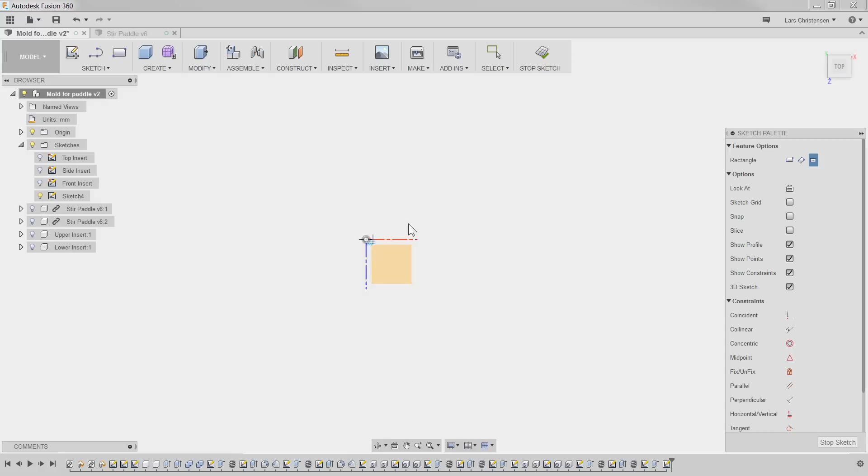And the biggest plate on this mold is going to be 396 by 396, like that. And we also have the mold plates themselves. They are going to be 396 by 296, like that there.

Now we could decide that we wanted to get the insert perimeter into this sketch. That might be helpful, so I'm going to use the project and copy that over. We'll be fine, so we can get that in from that top sketch.

I am also going to lay out some of the different bushing holes we're going to need here. So keep these at 30, and we're going to have a dimension from here to here.

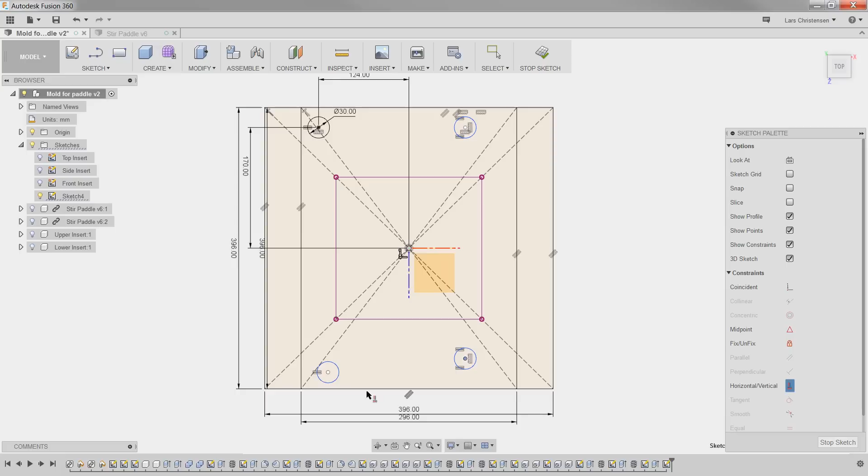So these 4 holes here are the ones that are going to be the locating holes for holding the whole mold together. We're also going to have some screw holes going through here, so I am going to put those in. I'm going to stick with 12 millimeters for that.

Now those are going to be in line with our bushing holes, so that's easy enough. And they're going to be in line with each other here. And they're going to be all 12. There we go, and they need a dimension.

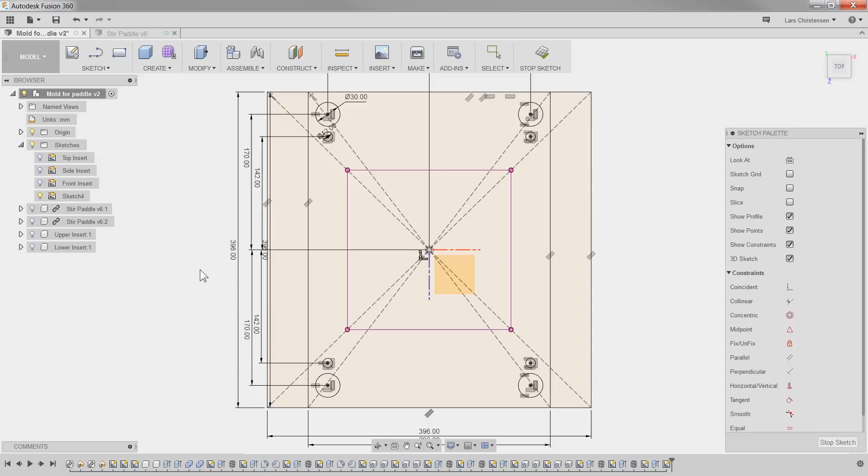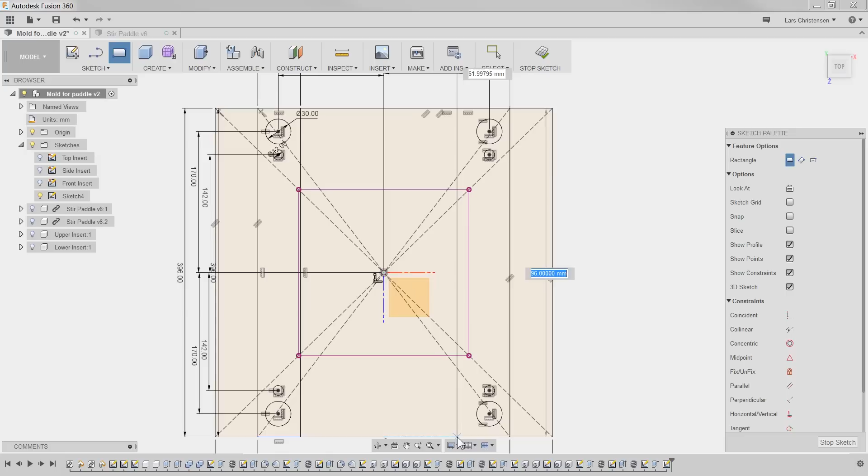Now another thing we need in here that I can recall as I'm sitting here drawing right now is we also need the risers, so we can put those in on this view too while we edit. So they are going to be 56 wide, and we'll have 2 of those, so I like to sketch those in. Like that there — I don't think I got the end of them. So I'm going to make sure that those are collinear with this.

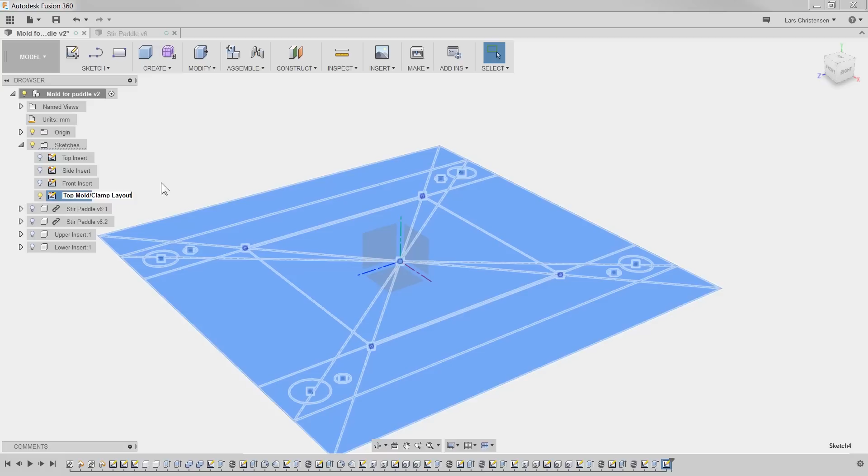And I think for right now that is pretty good for laying things out. I know I need to come back to these sketches later, but I'm going to call this one top, and I like to call them mold slash clamping. So kind of everything is contained in most of these sketches here. So we got one for that.

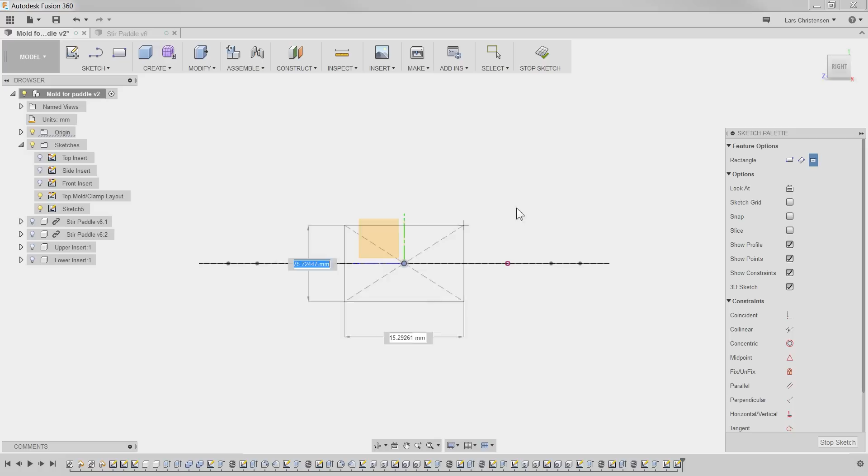And then I'm going to create the side one. And this one here is going to be a little bit more layered. So we can start out like we did before with our insert block — draw that one up there. And they are combined, so the blocks are 112. And again, the length of this whole thing is 396.

And I'm going to create that line to split the two, just like that. And then I'm just going to make sure what is top and bottom here. So this is the top we're looking at.

Now after this, we're going to have a spacing plate. And that's going to be 27 also, and that is going to be collinear with this.

Then we're going to have the riser, and those are going to be 56 tall, and again it's going to be collinear with that. And then at the bottom of those, we're going to have the last clamping plate. I'm not going to draw up the ejector plate in this view here. So that's also going to be 27.

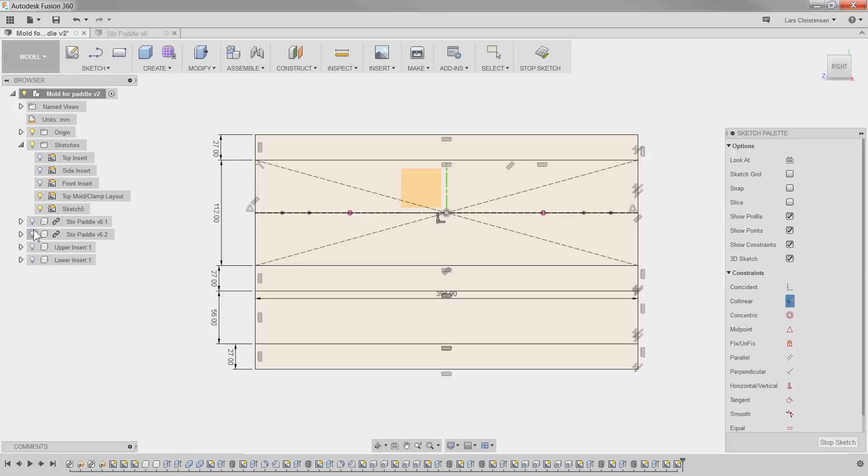And collinear there. Okay, now if you want to see, if I turn on the upper and the lower insert, you will see that they are sitting up there. That may have been a little bit helpful for you to see how everything is fitting together.

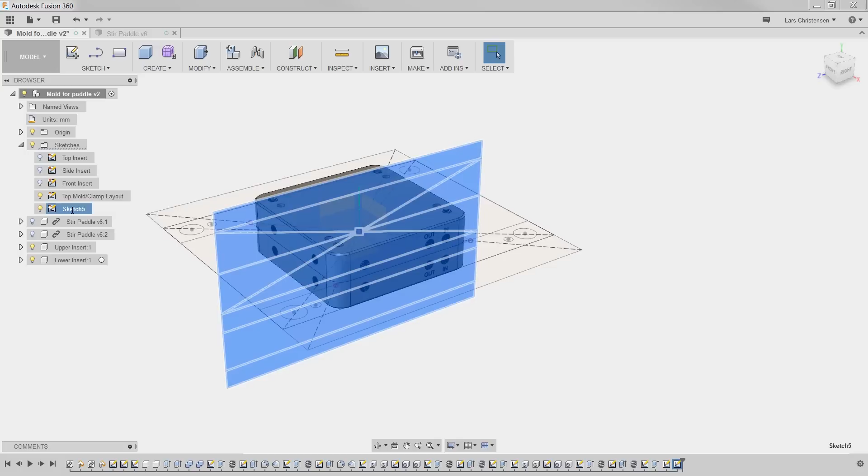So that is the side view of this. I'm going to go in and slow left click and call this side mold/clamp layout. Get that there. I can turn off these sketches, and I could now go in and create the last one here, which is going to be the front of this.

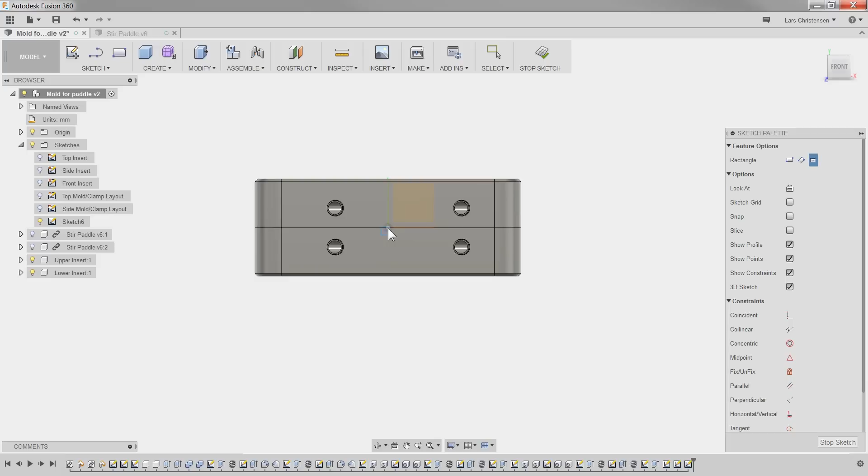So again, it's in a rectangle. It's going to be 112 tall by 296. That's our clamping plate right there. I'm going to hit L for line and create the center line there, and then build it up just like I did before.

So there is going to be a clamping plate up here. I'm going to draw it up here because it's going to be a little bit longer. The dimension here is 396, and it's going to be 27 tall. These two are going to be midpoint from here to midpoint from here, like that. So that's our clamping plate on the injection side.

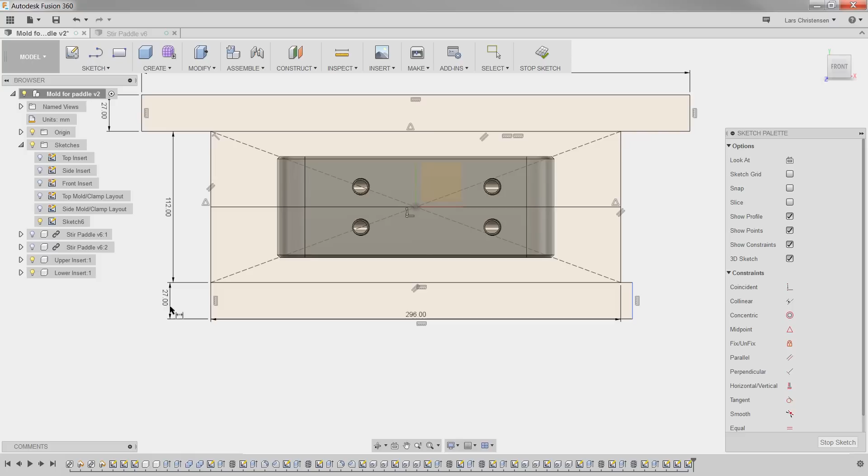Now down here, I'm going to create our spacer. 27. Make these two collinear.

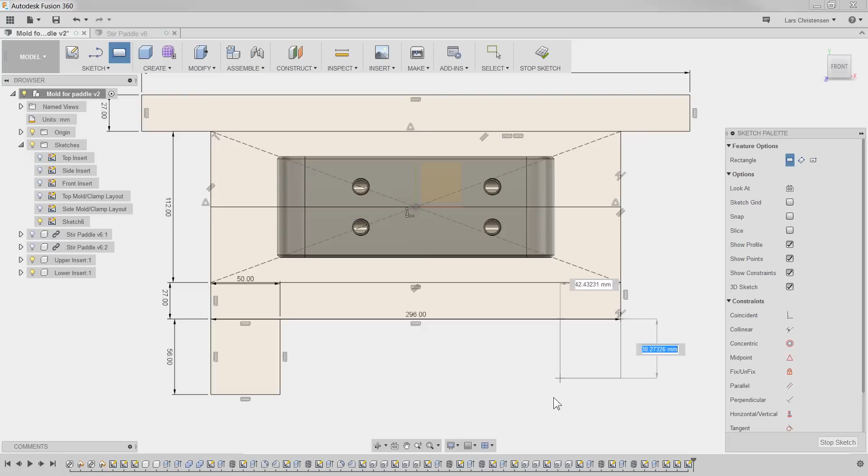Then we're going to have the two risers. They're going to be 50 wide. We actually have that dimension on our top layout too, if you remember. I'm going to make the risers here 56, and we're going to have another one of those on the other side, of course, 56 by 50, like that.

And then we're going to have a clamping plate down underneath here. So hit the S key, let's get the rectangle. It's going to be 27 by 396, like that here.

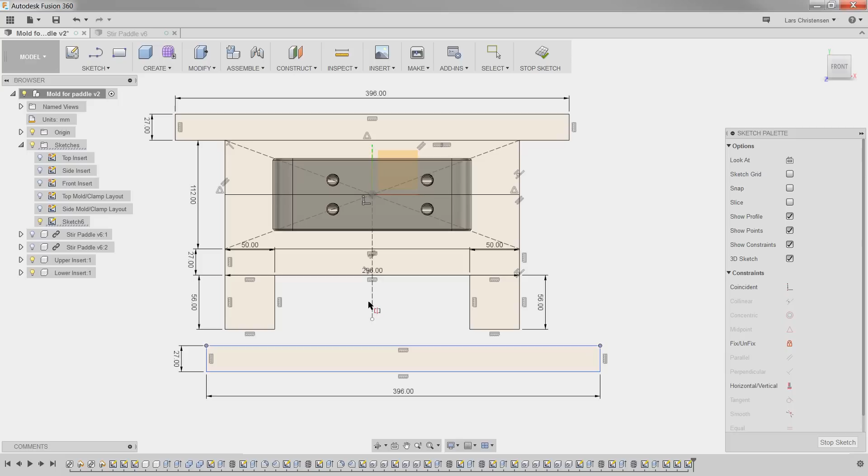Now I want to place it using the collinear. So I'm going to hit a line, it's going to be a construction line, sure it's here, hit X on the keyboard. And now I can use my favorite symmetry relationship right there, that's going to place the symmetry and then collinear from here to here, like that.

And now I could also go in, we're going to have the ejection plates in here. So now where are we at? Why don't we do that. There's going to be an ejector base plate, that's going to be somewhere in here.

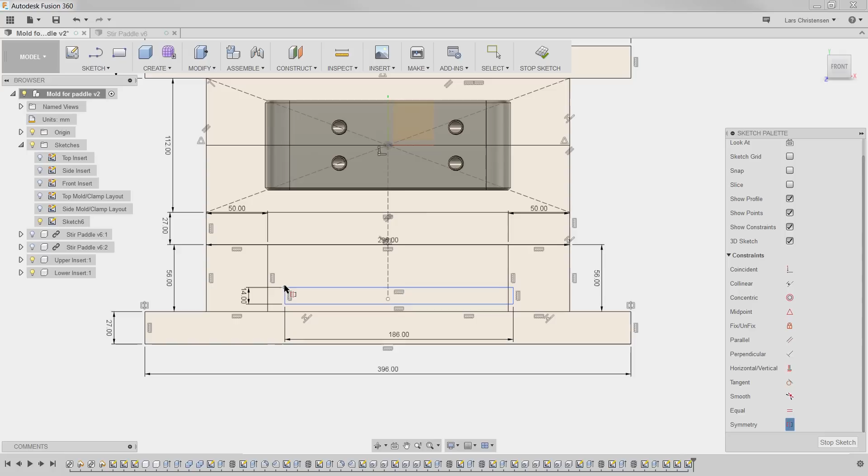I'm going to make the base plate 14 thick, and I'm going to make the width of it 186, like that. I'm going to use the symmetry again from here to here, and then place a dimension here to here, and I'm going to leave it at 5.

And then we're going to create the ejector retainer, the one that's going to hold the retainer plate. So that one's going to be 12, and make that and that collinear here. That's going to be the layout for the front of the layout sketch.

So I've laid everything out that we pretty much need, except for the ejector pins and the sprue, the inserting of the plastic. So I'm going to call this front mold clamp layout.

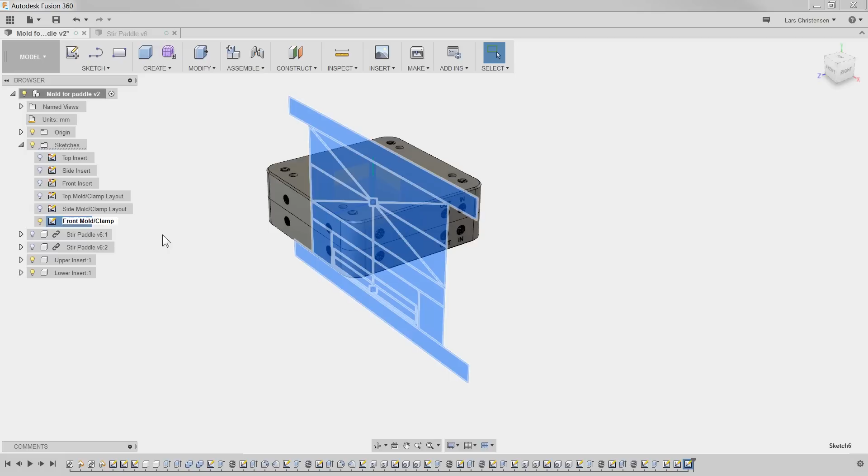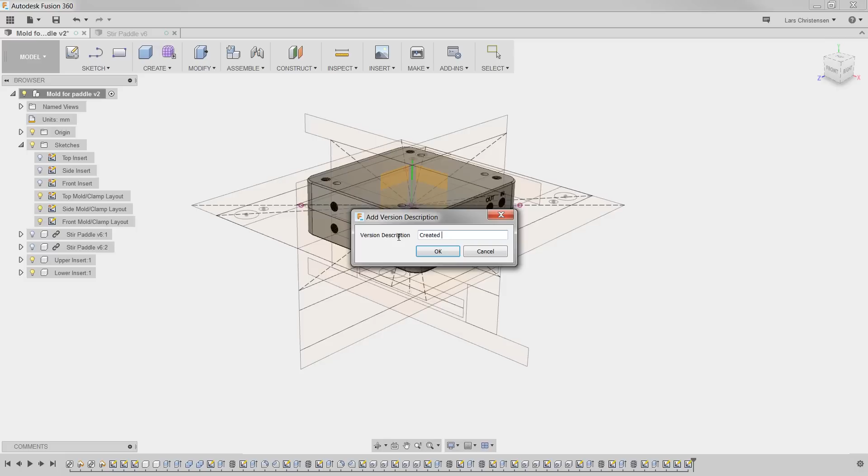So I really hope that with these sketches here, it starts making somewhat sense of how I'm laying everything out and correcting everything from these plates. Again, now at this point might be a good time to make a version. There we go.

Create all the missing plates we have right now. So I'm going to uncheck our cavity blocks, we don't really need those right now, and we can actually go out and maybe just do them all from the side here.

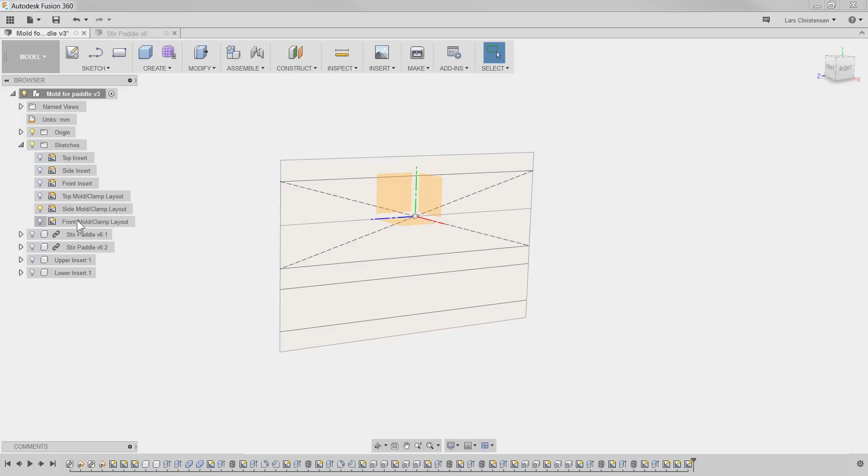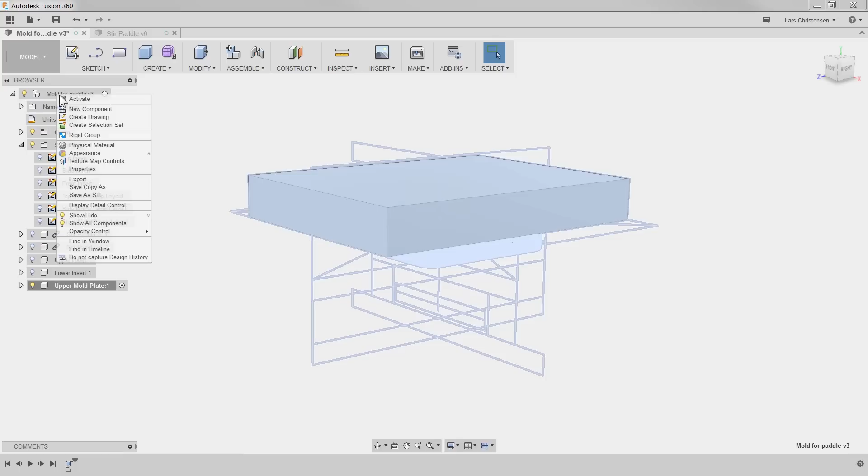And with that active, I can just go in here and do Q. Select our rectangle here, and just like before, I'm just going to go ahead, go symmetrical, full width, and then it's going to be 296. And then I can just work my way through this. Hit Q.

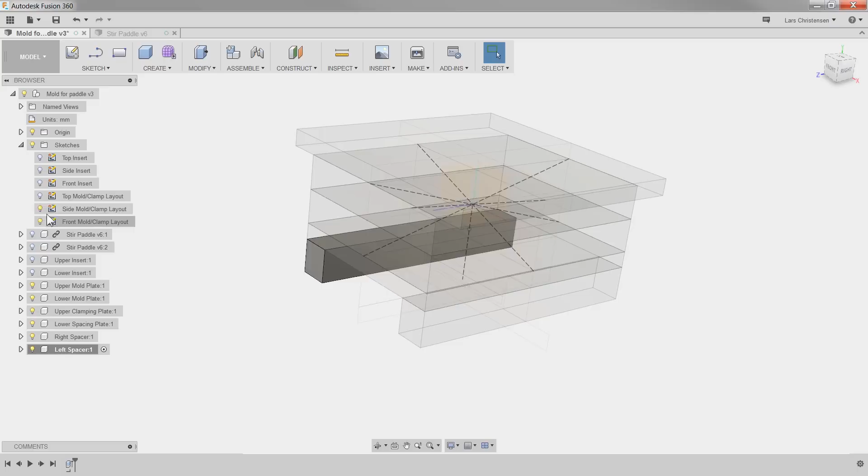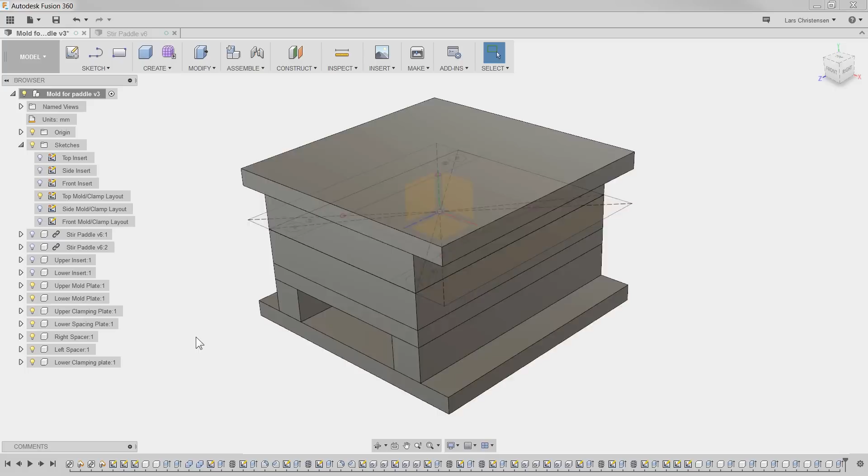So if I go over and make the top there, we really have the whole mold. We're still needing, of course, the injector stuff, the injector plate. But I think you now get a good idea about how we're using all these layout sketches, which means that with these layout sketches, I can start working with different things. So if we go back to the top one that we had before, we can now see that we have things laid out, and we can lay out the different parts that we need in here.

So what I probably will do now is I'm just going to start breaking down each component. I could actually be a little bit lazy and make cuts that go through numerous plates if I want to. Even though I'm out here in the active component, if I hit Q and I, for example, hit all our components here we have just created, and I select our bushing holes here, now I'm going to have this 30 millimeter bushing go through absolutely everything in here,

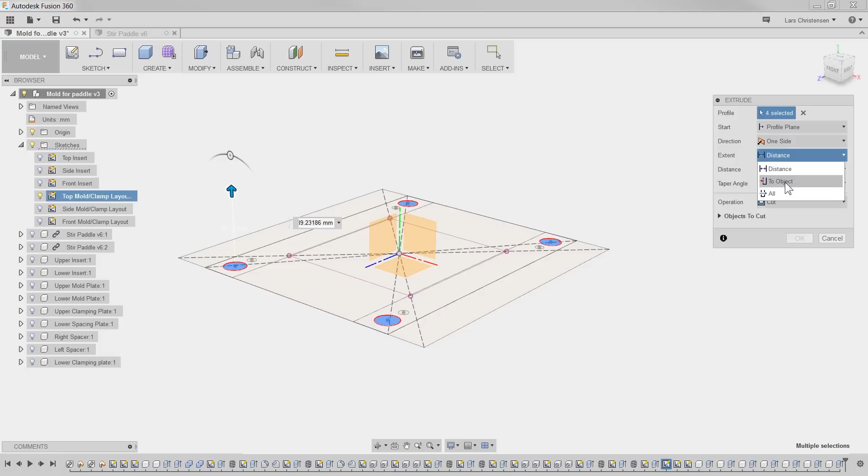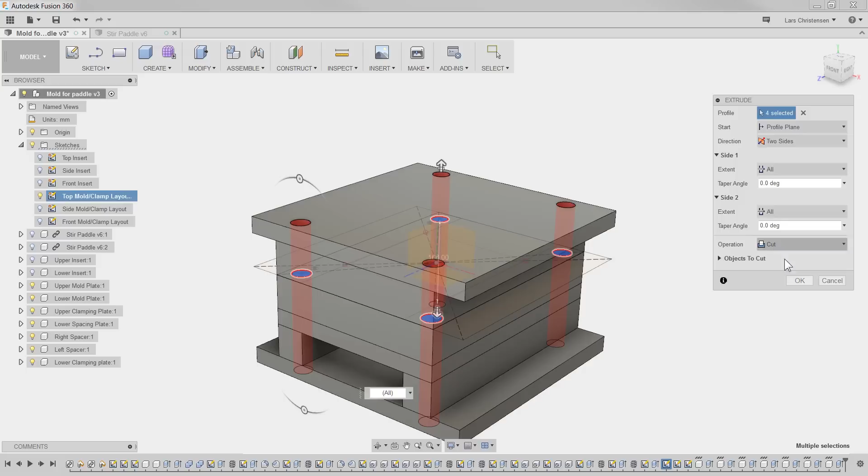through everything both ways, like this. So if I turn everything back on, I can actually grab here and grab here, and I can say through all, and just like this I have now created that cut, because that's going to be the same diameter all the way through the entire thing. And you will actually see, if we go in and we look at each component, we now actually have that cut right there, through them. So it will propagate down that way.

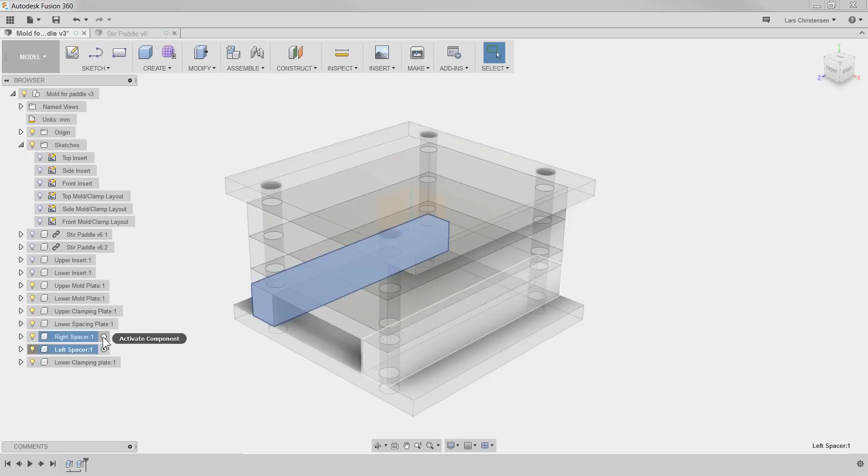But I think just to make it easier, what I'm going to do is work on each plate individually. I think that's a little bit easier. But again, the top sketch here is driving the different pieces. So with the upper mold plate here, I got a couple of things that I got to get in here. First of all, I got to get the screws in here, and I got to get the cutout for the insert plate.

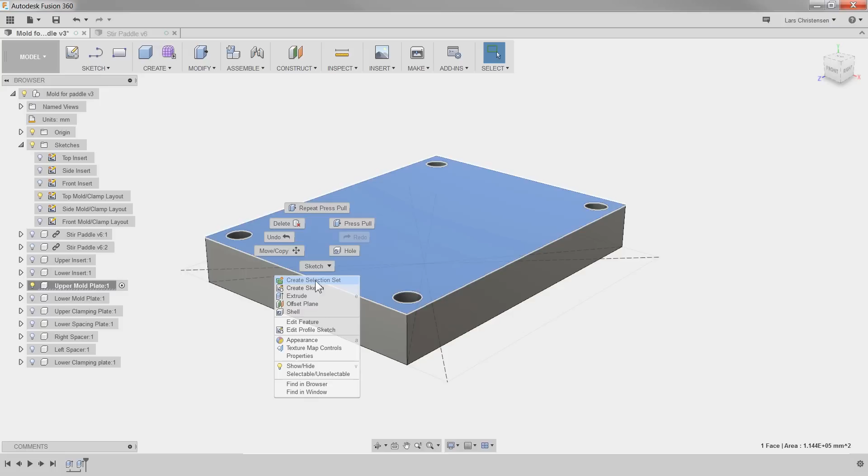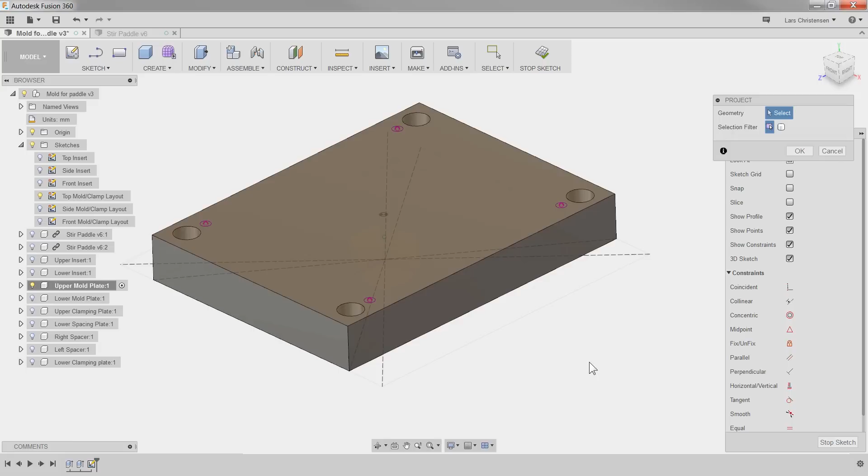So just as before, I can open up a sketch on the back side here, create a sketch, and I can project our screw holes. That's our 12 millimeter screw holes right here. Hit Q, and I can now do those just like we did with the inserts. Select those. Down here, -30. Like that. Select them all. Zoom in a little. That, and make them the 12 millimeter threaded right there.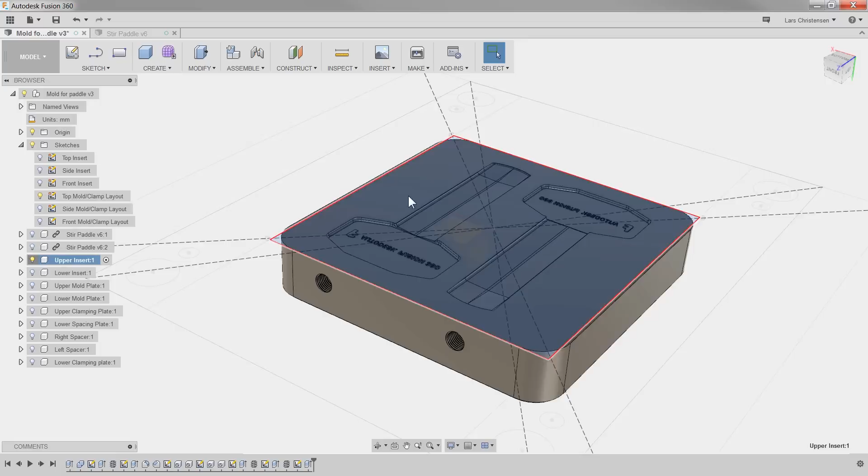The other thing I will do on this one is I gotta do the cutout for our insert. So this will be the upper insert, right? We gotta make a cutout for that one. So the upper insert here, make that exit for a second, is going to measure 37.5 thickness.

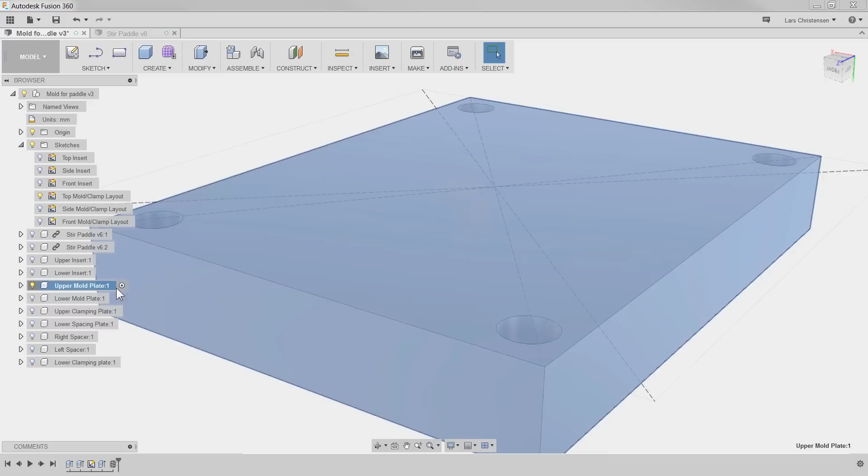So if we turn that off and go back to our upper mold, make that active, I'm spinning it around a little here, sorry. Create a sketch on that face. If we turn the top on here, we actually do have that cutout right here, so I can project the lines for that, like that. Hit Q, and we can extrude that down minus 37.5.

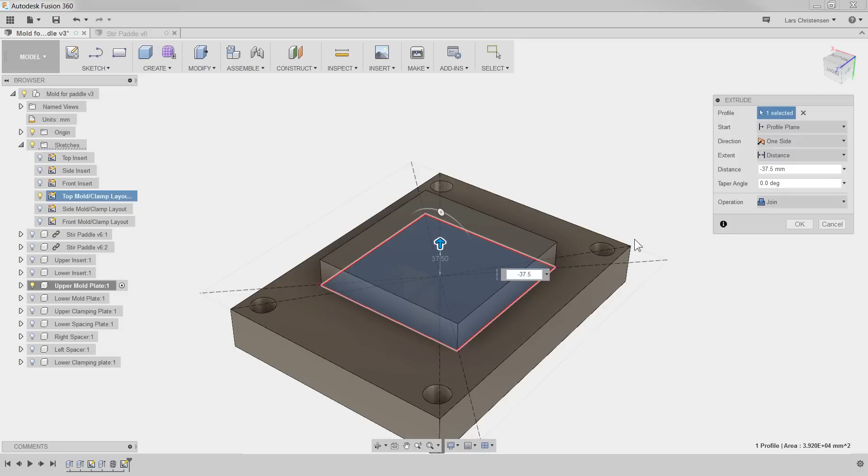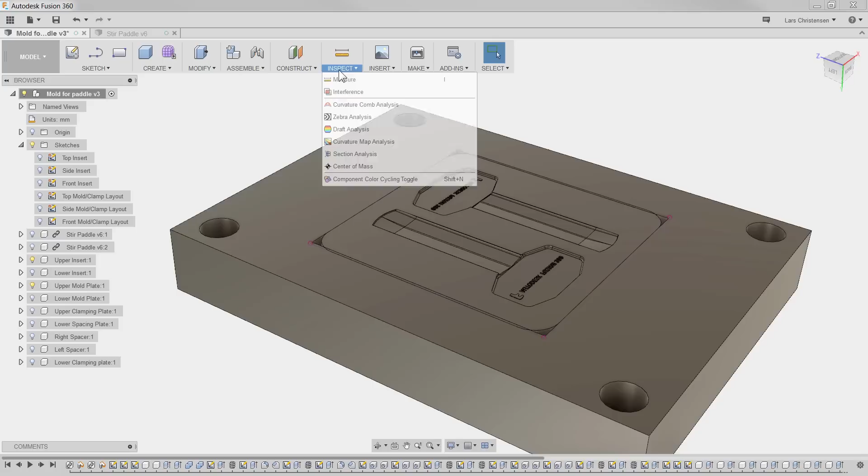Like that there. Now if I turn on the upper insert, we should see that that sits in there nicely. Hide that top sketch for a second. I'll turn the origin off. So now we have that in there. And again, don't forget, you can always use the section analysis tool to go in and confirm that things are as we want. Hide that upper one again. And now we can work with this one and get the things done to this plate as we want.

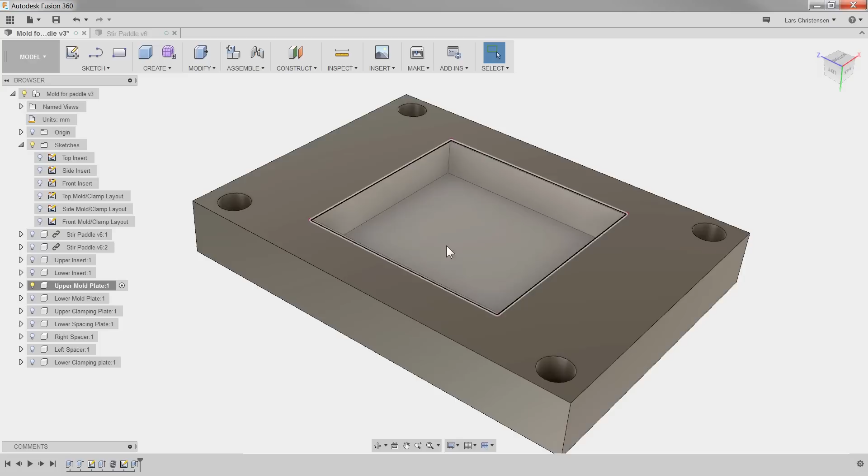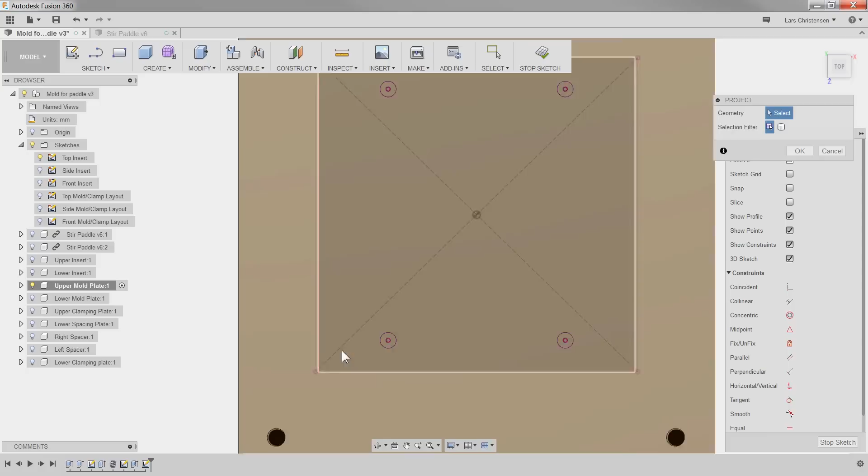We, for example, need to transfer the dowel pins and the screw holes from the insert over to this plate. So that is actually the top of the insert sketch up here, right? So if we turn that one on, we gotta copy those holes. So we can do that if we open a sketch down on the bottom here, create a sketch, and turn that insert on there, and then we can project the dowel holes, which can go all the way through like that. And the clearance holes here, we can actually offset that.

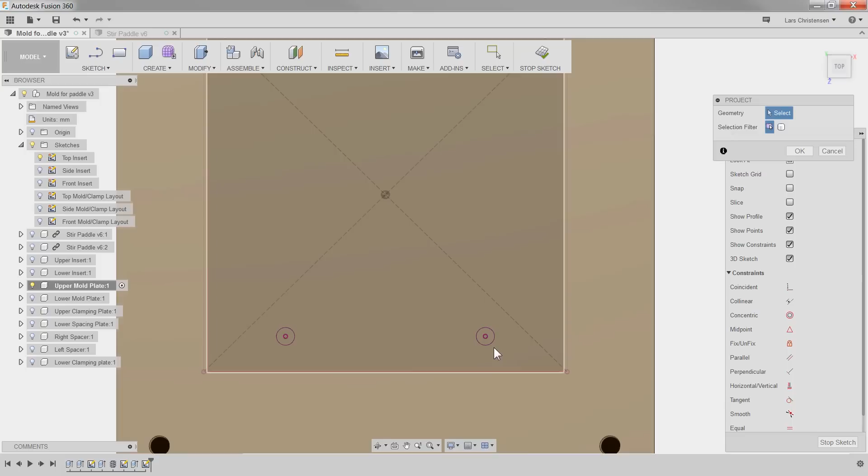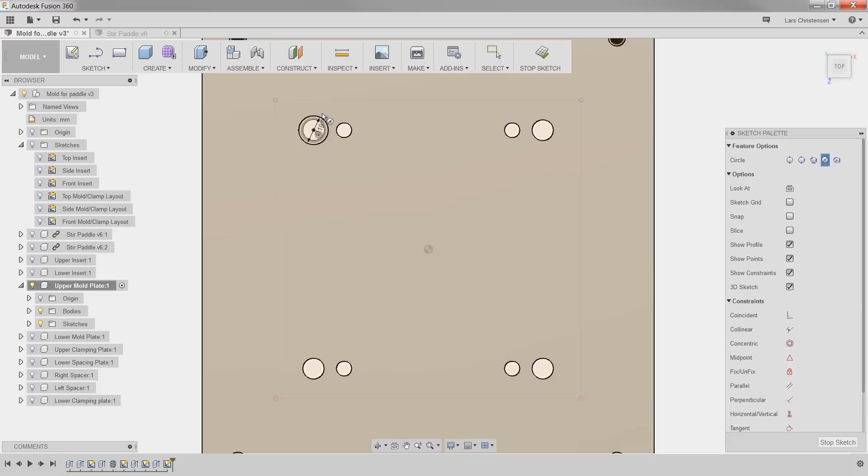So if we hit P for project, we can project, and then we can select the screw holes here. And then we can actually offset those by O. I want to do the counterbores, and actually here you probably again could use the hole command, and you could get the whole thing modeled in. So there might be a little bit more practical way to do this.

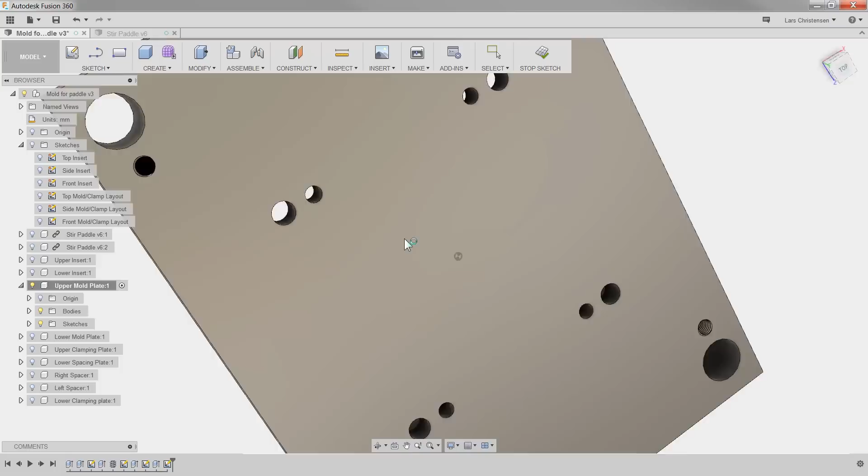This, and also I would also say that the depth here, you probably should also add the clearance in here. I'm just gonna do it to the nominal, which is 12 millimeters. But that is our counterbore and our dowel pins for the upper plate.

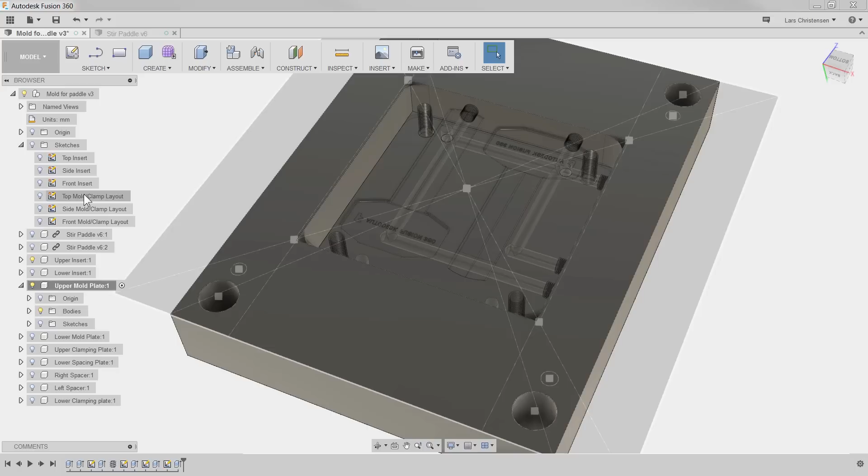So again, we're using the same sketches to create this as we did to put it inside of the insert block, which means that, again, if we ever need to change a dimension, if we decide to move the holes or the dowel holes in the insert block, they will automatically follow here.

The next thing I'm going to do here is also create some clearance holes for the water channel. So there's going to be some brass rods, pipes that are going to go in here to clearance, and also add some chamfers to the outside of this mold plate. And then actually repeat that and do it to the lower mold plate also.

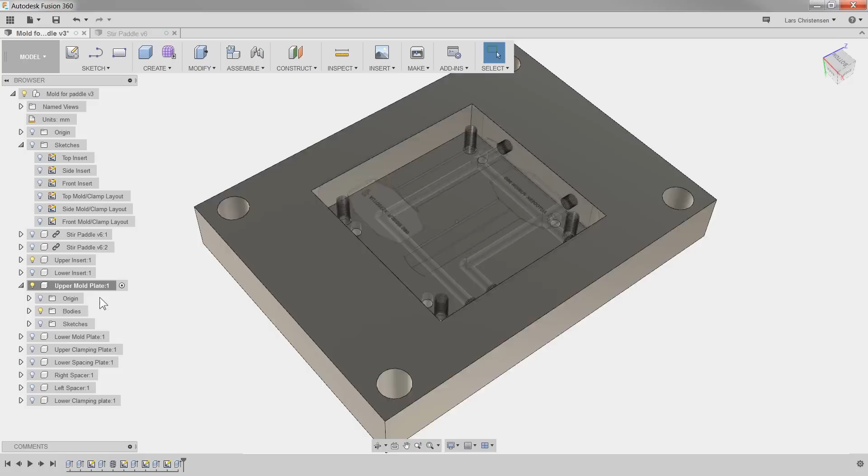And of course we can do a couple of things to this to make it maybe a little bit more pleasant, I guess we'll say. And of course, how crazy you want to get with the details on these types of things is completely up to you. Add some chamfers. Whatever we really want here.

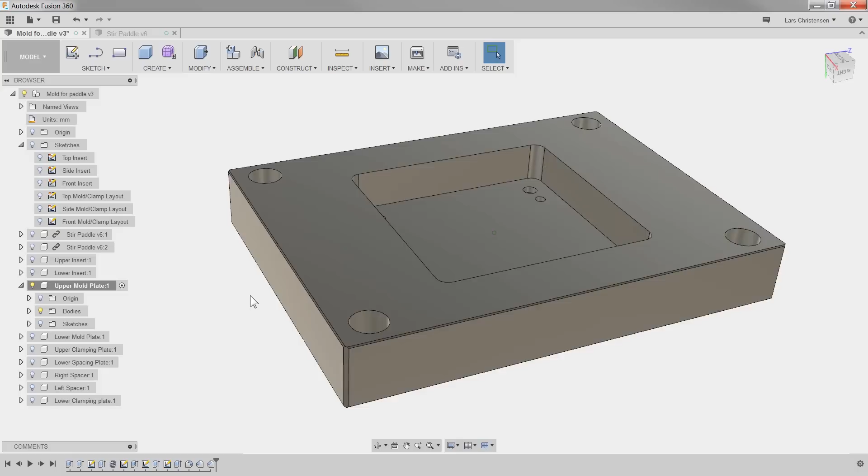And on this one here, we're also going to have a recess over here for when the bushing goes in, the pins go in here. We also still have to do the water channels. But before I go to that, I actually think that I am going to go and do the same thing to the lower plate as we just did now.

So if I turn the lower plate on, we will see that we need to do pretty much the same operations as we just did. For me, following them along in steps, pairing them up, makes a little bit more sense. So go ahead and do that.

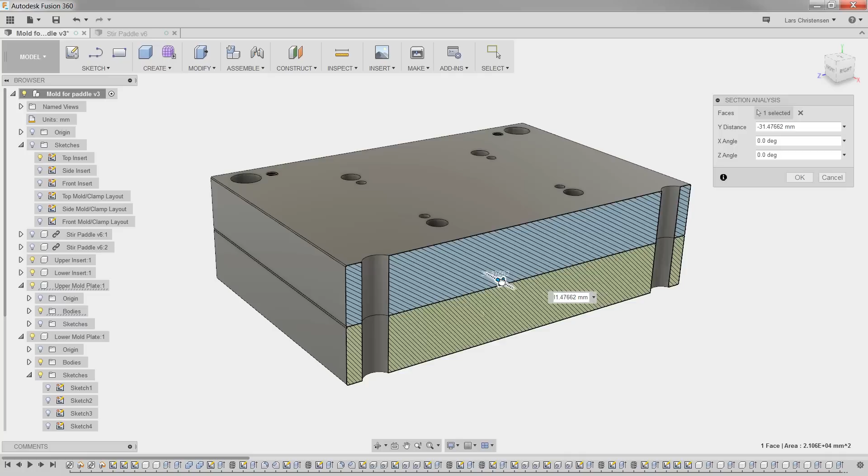All right, that should bring our part to just about where the upper one is. So these two are now identical, the upper and the lower, these two plates. And if we turn on the inner inserts, they should be in there too. I really like this section view. So there's our 12mm screws going through there. Then we got our inserts in here, and our screws and dowels and our parts and all that good stuff.

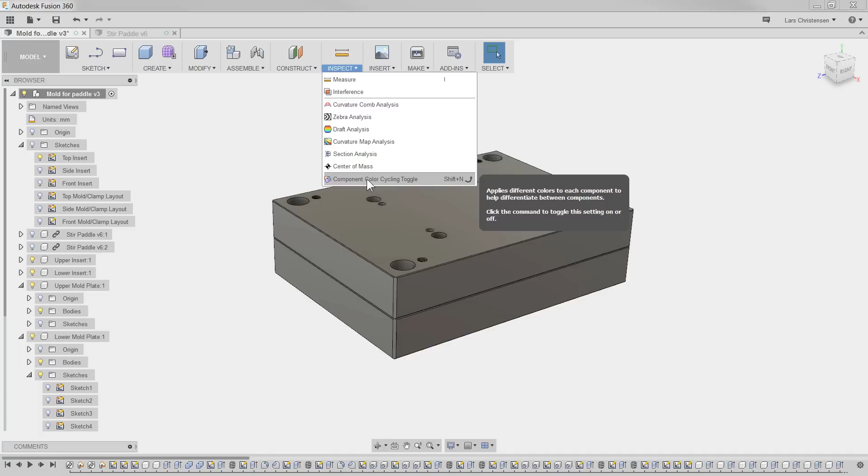Another trick that might be helpful to show is to turn on component color cycling, and that would actually give different components different colors. If I turn on the upper mold plate, you will see here is the upper insert, and if I turn the upper insert off, it's actually breaking everything down into components, which can make it a little bit better to break things apart. It's a nice tool to know about. I'm going to turn that off. So you can use that if you want to.

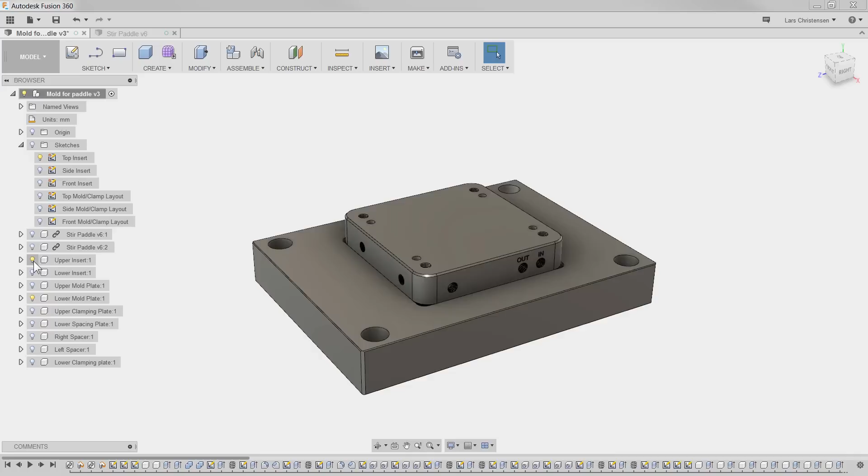Now a couple of things we need to do to these is the countersink, and we also have to do the coolant channel. Now the coolant channels are really just clearances for these two holes here for both the inserts. So if I just turn the inserts off, those two are clearance holes. If I turn those two on, that would be on the insert side. If we open that sketch up, we will actually see the shadows of those holes in there.

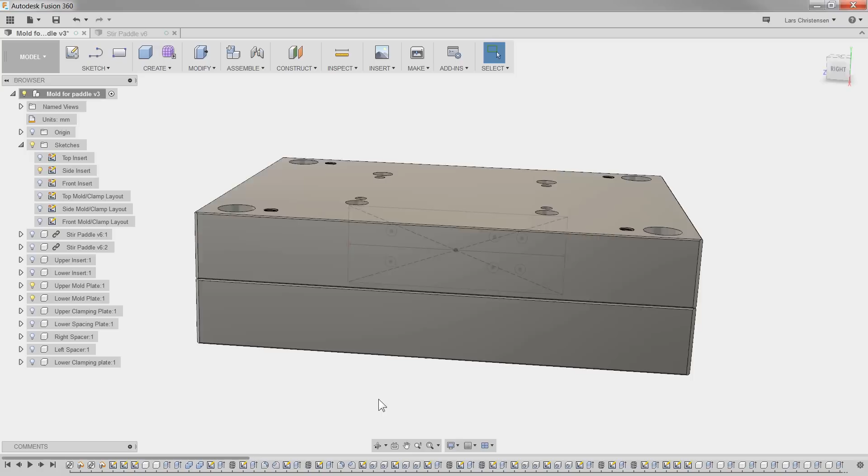One thing to know is that even though I'm out in the overall active component, if I turn these off and I do a Q and select them, I can actually cut them through the upper and the lower mold plates just from in here. But I actually want a little bit of clearance. I want them to be a little bit bigger.

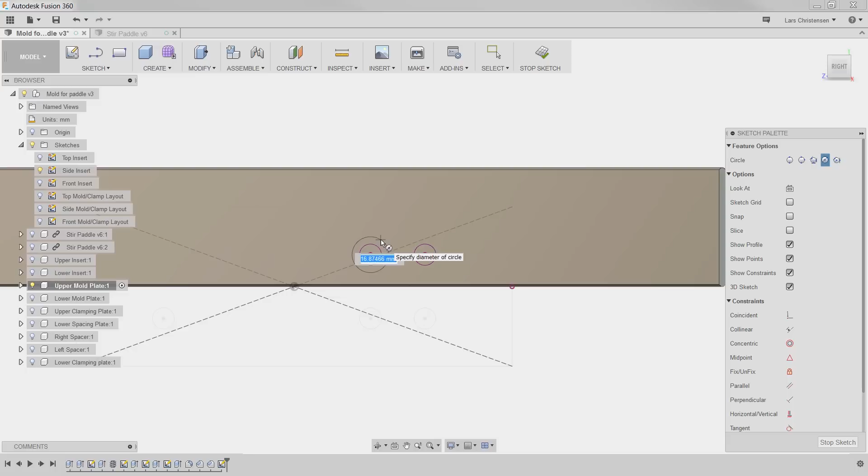So what I'm going to do instead is turn each mold plate active so I get the sketch, and then go in on this side here and create a sketch. I'm just going to hit P again for project, grab the two holes just like this, and then hit C for circle or O for offset, and you can now add whatever clearance you want. I'm not quite sure what size I want. Maybe I'm gonna make them a little bit bigger just because I know there's gonna be a pipe in there. Make them 18. And again, if I use relationships, I only have to change one to get them to the same size.

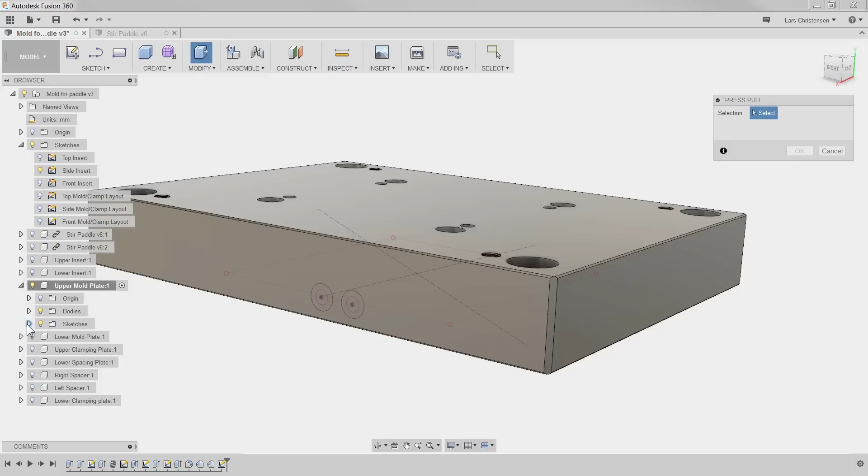Hit Q. I'll turn the sketch off and this one in here. Make sure I get both here. And then I'm actually going to cut with them, and I'm going to cut up to object, up to this face here. And there I now have that clearance. And I can go ahead and do the same thing to the lower one here.

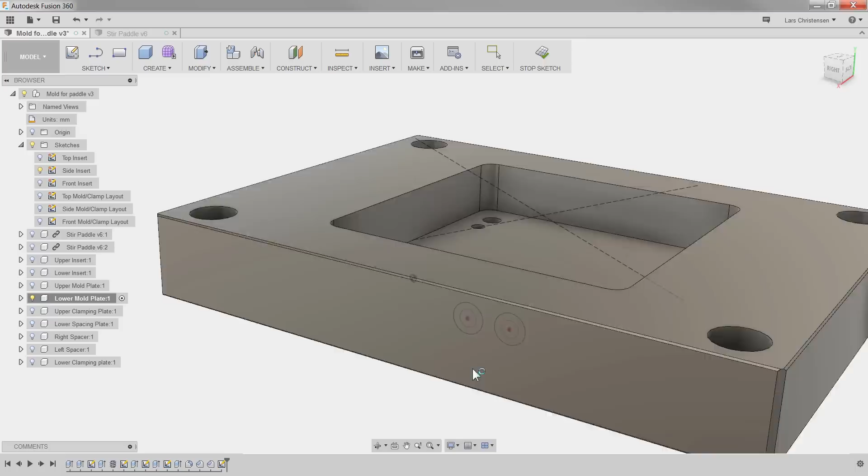Like this, we should see in here that we have these two holes. And again, because we projected these, if we're moving the coolant holes in our side sketch, if we're moving these coolant holes up and down, remember that was the ones that had the 15 in them, the 15 step, then everything will move along with that.

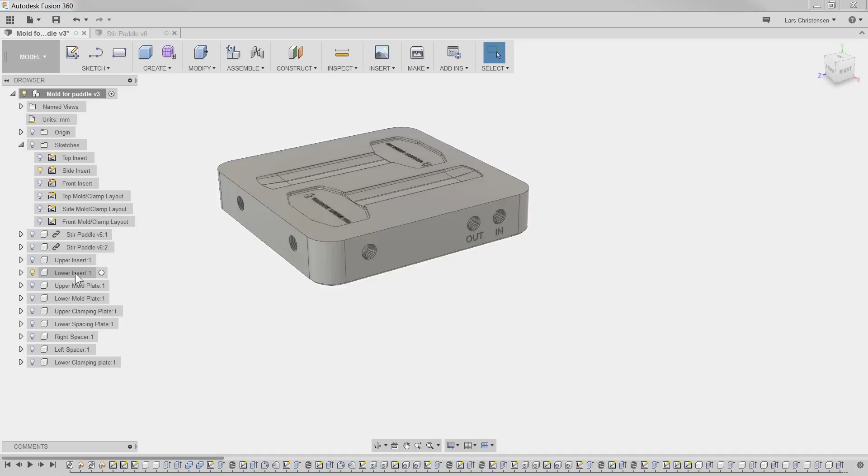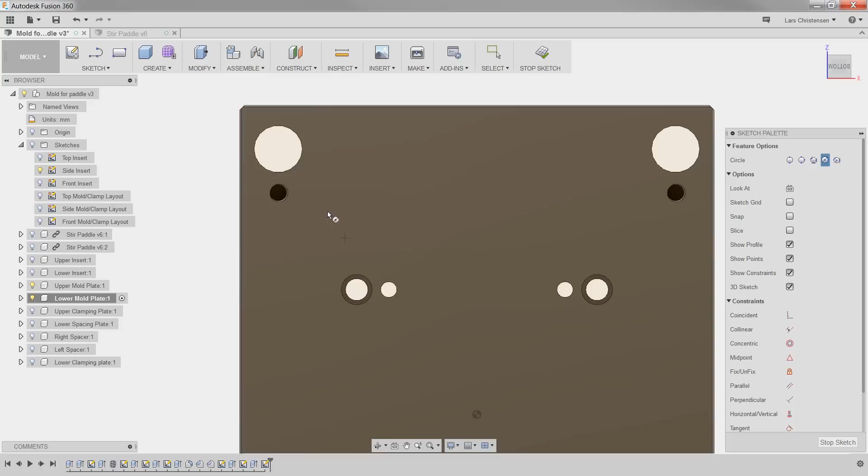Now another little nice touch, I think, for this is see how on the insert we have in and out, and I will carry that through on these two plates also. Put into these is the counterbore here on the back. And I'm just going to draw that on each individual plate. So C for circle, it's going to be 41. And they're going to be 6 millimeters deep. -6. Do the same thing to the other side.

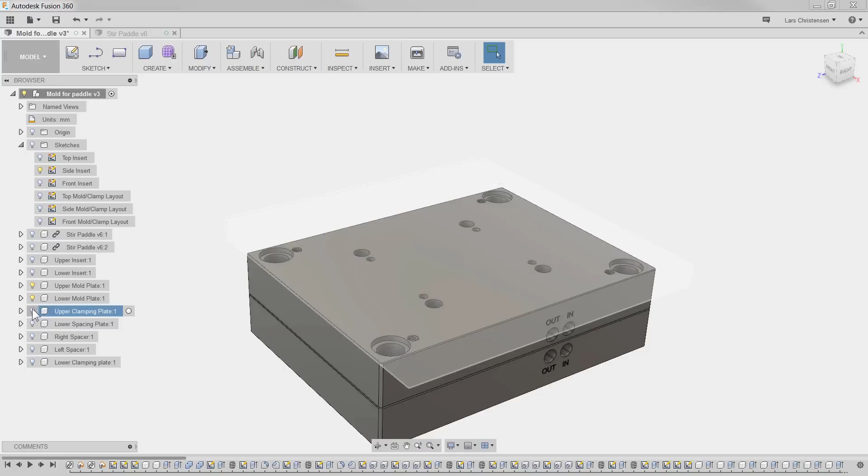And there we have the two mold plates. Still a few things we need to do: the injection and the sprue. Now we can move on to the upper clamping plate. So on that one here, we really just need to put in the counterbores for the screws. And then on the clamping plate, there's also going to be a recessed ring here for the sprue locating ring. Again, I'm going to go back to the top layout sketch to get the location of these holes.

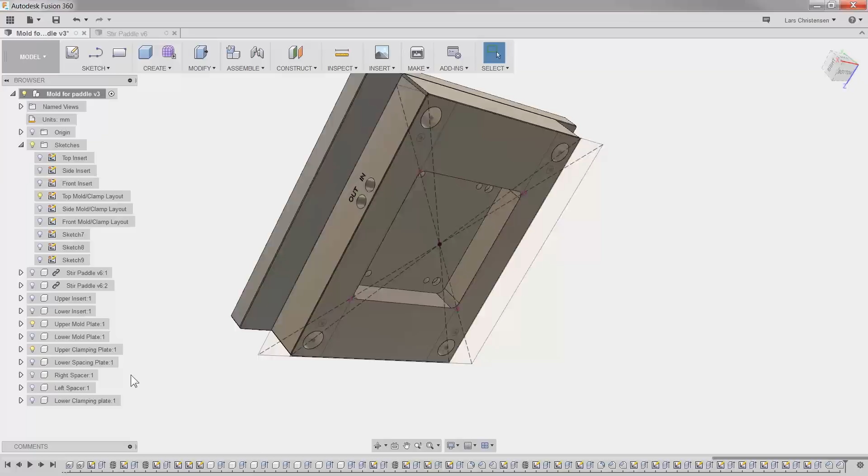That's the upper plate. Now we got the upper and the lower plate there. And if we turn the upper insert on, we can kind of see that we have that first section, really half of the mold here, besides, of course, we still got to do the sprue in here.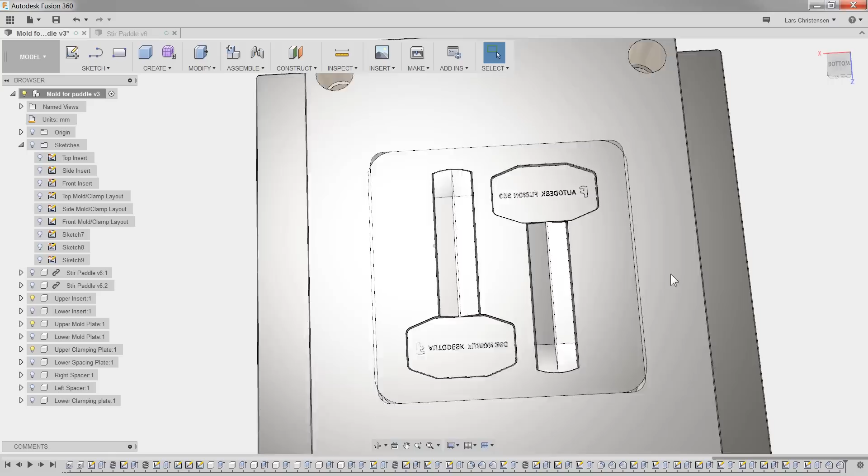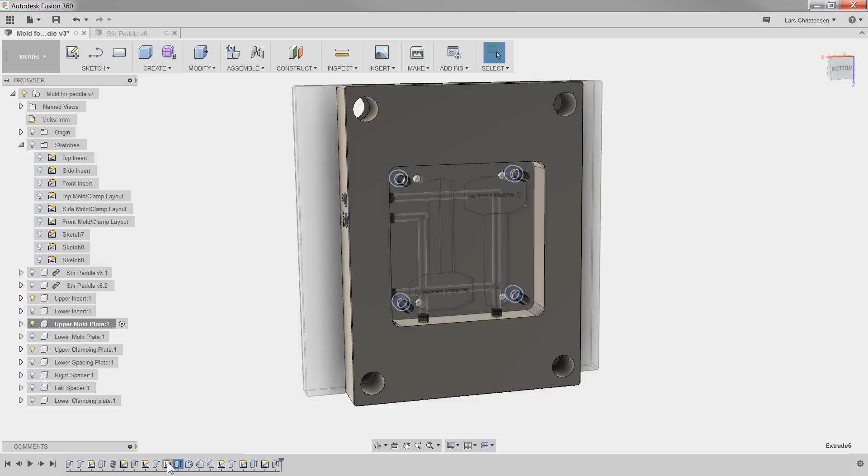If I'm looking here, you can actually see that I made a mistake. I picked the wrong side to cut out on the side here. So that is a perfect example of a mistake, but I have a feeling that it was when I made the cut in this plate. So if I click on this one and I make it active, I should actually be able to find out where exactly that cutout happened. There's the screws. So I bet you that it is this cut here. I didn't select the right thing. So I'm just going to right click and say edit feature. And if we hide some of this other junk and we go normal to the top, I have a feeling

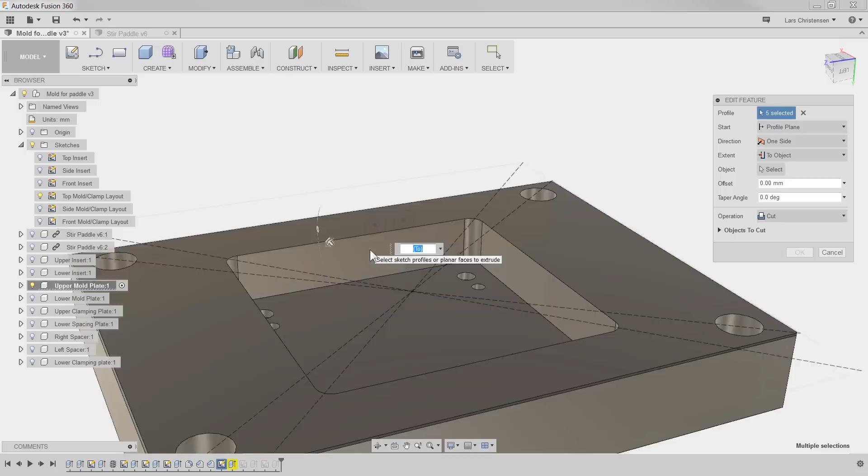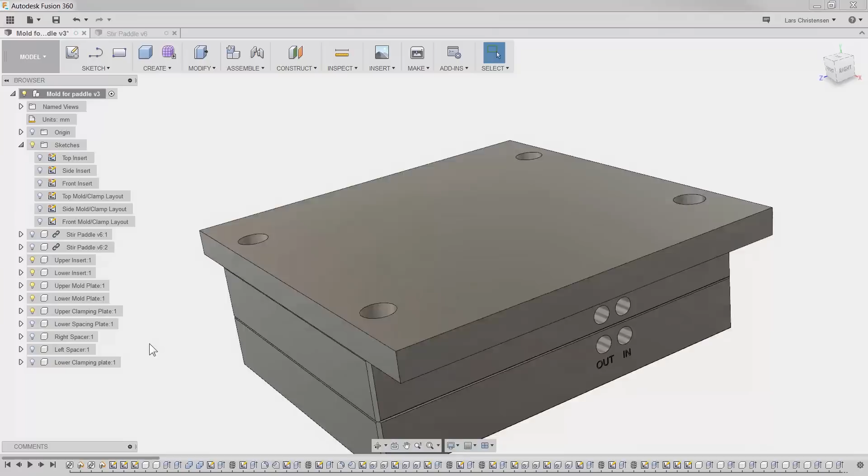Alright, so a little confusion on my end selecting the right geometry when I did the cutout before. Now it looks better here, right there. And let me just check the lower mold, because maybe I did the same mistake on that one. I did not. That looks right. Okay. So at this point, I think that we can say that the upper and the lower mold are just about done. We have the upper clamping plate sitting there. That one right here. I'll roll a couple of things back. Sitting right there with its chamfers on. So in this case here, that upper section is done.

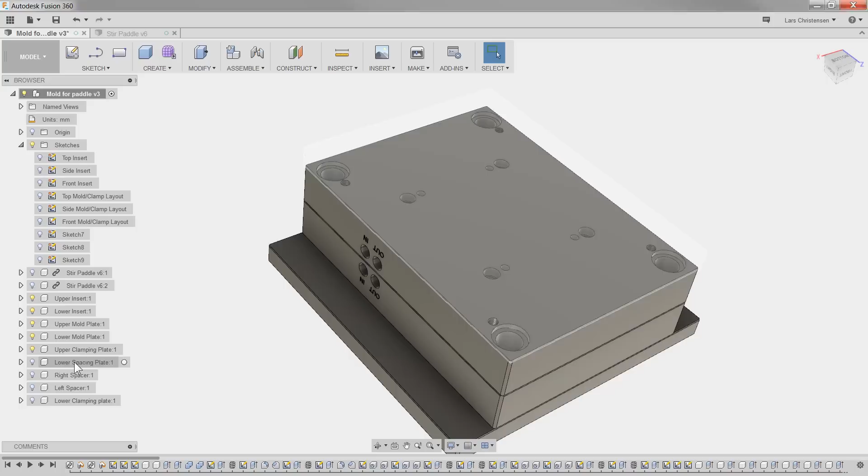Now let's move to the lower spacing plate that's sitting down here. And I think at this point, you kind of get a gist of what I'm going to be doing the rest of the way here. So I'm just going to speed this up a little.

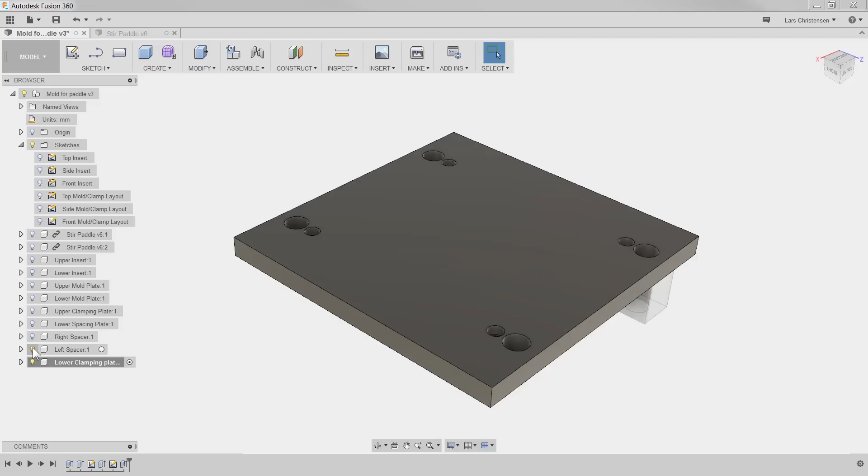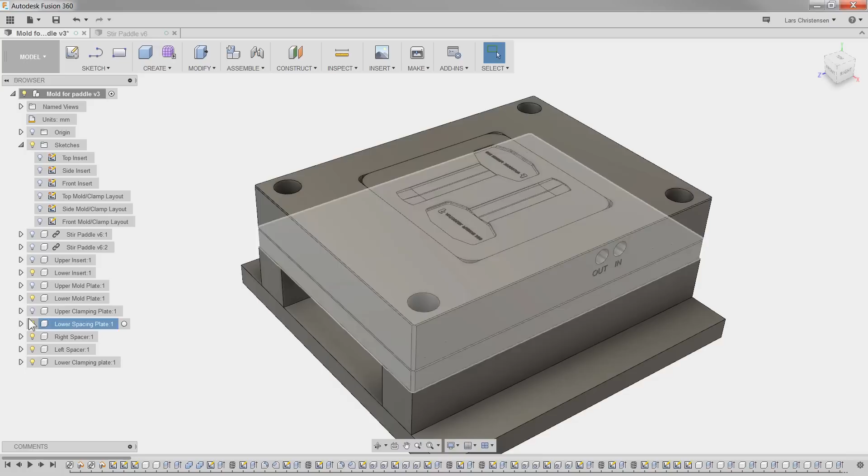Alright, that gives us the lower clamping plate. It gives us the left spacer with a hole through there. We got the right spacer, like that. Lower backing spacing plate, backing plate. Whoops. Then we got the lower mold plate with the lower insert in it. And then we can flip it to the other side where we're going to get the upper insert with the upper clamping plate and the upper mold plate. All right, so things are coming together here.

All right, so as you can see, we all run into some problems from time to time, and I felt like I didn't want to just cut it out of the video and try to make it go away magically. All right, again, I really appreciate you taking the time to sit through these videos.

I think that now we are ready to attack the sprue and the injection. We got the whole mold base laid out there, and I hope that you start seeing these layout sketches, the power of those, how they can help you create things.